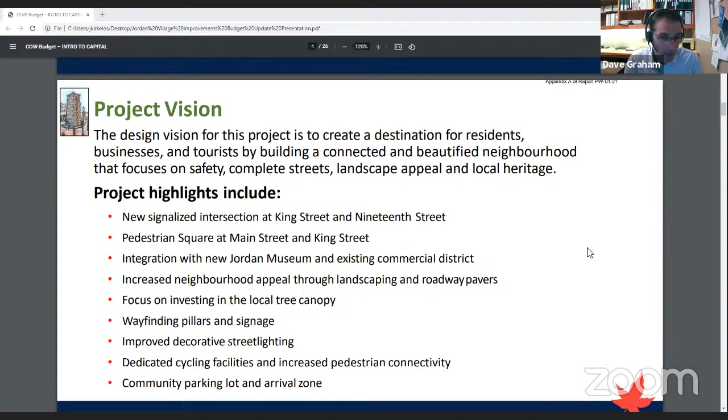So what we heard from the November 23rd Committee of the Whole workshop, we put this into some main themes. First, review the proposed soil cell and roadway pavers components of the project to help reduce overall project costs and determine applicability. We looked at opportunities to further enhance the gateway and wayfinding pillars. We want to include electric vehicle charging stations and consideration for paid parking, and also develop a community and local business communication strategy.

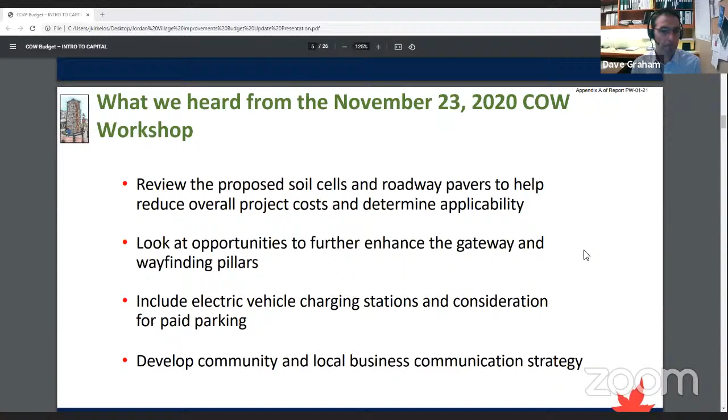So looking at soil cell technology, innovation in green infrastructure — what is it? It's an underground system that allows increased volume of organic soil beneath hardscape surfaces. You can see from the image there's a graphic to illustrate that. What this avoids is organic soil compaction around the tree root system. It enhances long-term tree health and life expectancy, increases the growth rate, speed, and size of a tree, prevents cracking and heaving of adjacent sidewalks and roads as the tree grows, promotes large tree canopies, reducing the urban heat island effect — which is really important with climate change and increasing temperatures. It provides stormwater quality benefits, and it doesn't require any ongoing maintenance.

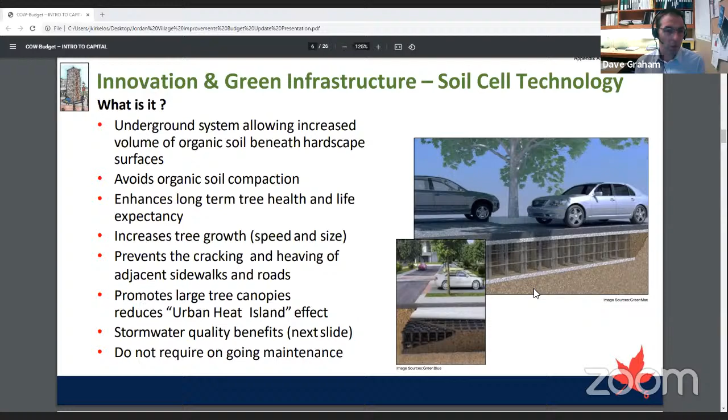From a stormwater management quality and low impact development perspective, soil cell technology can be used in conjunction with other stormwater management systems, such as oil grit separators for example — that's referred to as a treatment train process. The objective is to help clean the stormwater runoff quality. The soil cells capture what's called the first flush: when rain first hits the road and runoff starts draining off, we can capture contaminants like nutrients, hydrocarbons, and heavy metals. More importantly, through that process the stormwater is also providing irrigation to the root system of the tree to help promote its growth.

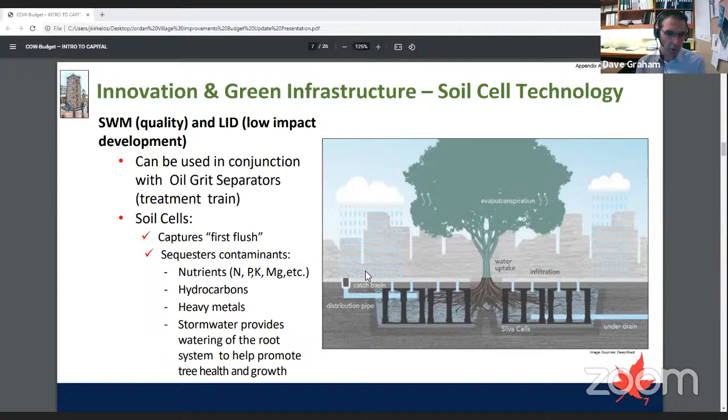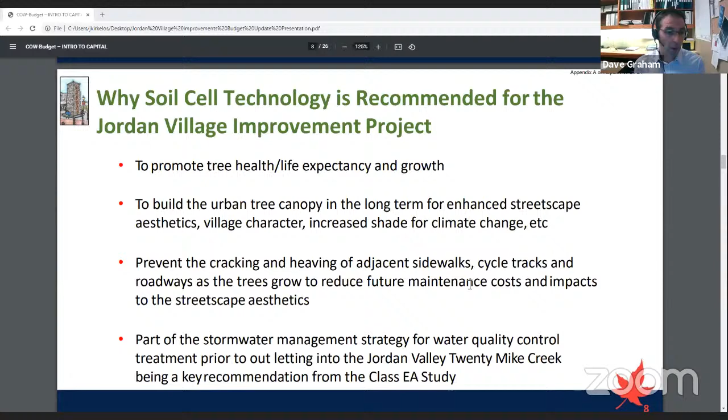So why is soil cell technology recommended for the Jordan Village Improvement Project? Number one, to promote tree health, life expectancy, and growth. We want to build the urban tree canopy in the long term for enhanced streetscape aesthetics, village character, and increased shade for climate change. Another important factor is preventing the cracking and heaving of adjacent sidewalks, cycle tracks, and roadways as trees grow, to reduce future maintenance costs and impacts to streetscape aesthetics and our investment in these surfaces. It's also part of the stormwater management strategy for water quality control treatment prior to outletting into the Jordan Valley 20 Mile Creek, which was a key recommendation from the environmental assessment study for this project.

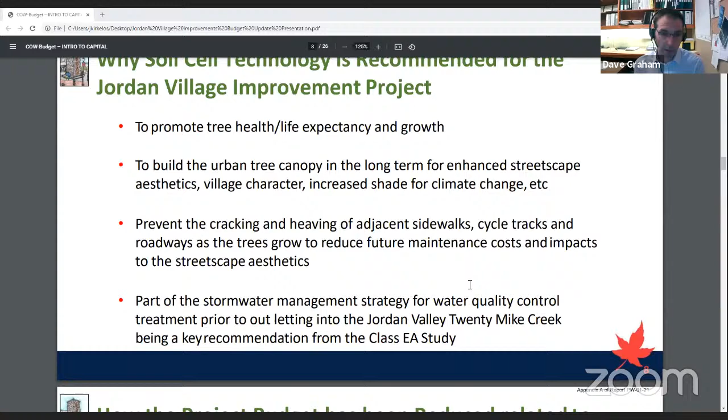How has the project budget been reduced related to soil cell technology components? The design team went back and spoke to municipalities who have used soil cells before. As highlighted earlier, we reached out to VRIC, who are experts in this field, and got a lot of good feedback from that consultation, and good advice on how we can further prioritize this technology on our project.

In an effort to look at costs, the design team has further prioritized the soil cell locations throughout the design and reduced this component by about 50%. For example, we've removed soil cells along 19th Street. We believe that in strategic locations where more space exists for tree health, we can augment those locations in lieu of soil cells. Some strategies we'll use: working closely with VRIC's tree scientists on developing enhanced soil specifications for trees where we're not using soil cells, and working with residents along 19th Street's east side, where we may place trees a bit further back from the sidewalk areas on private property. So we're going to look at that option as well.

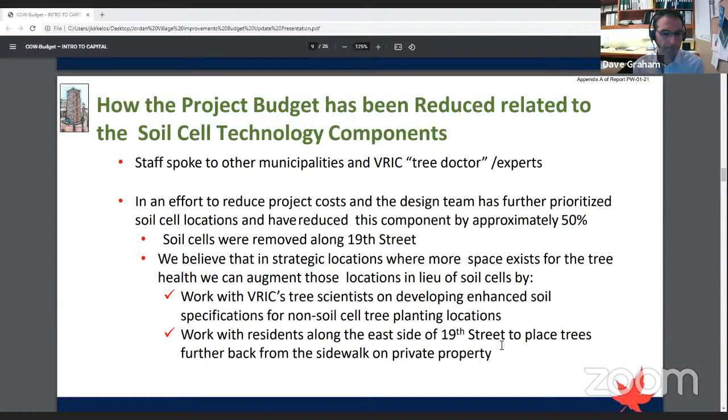So the remaining soil cells, we're only going to strategically locate those along Main Street, the pedestrian square area at the end of Main, south end, Snur Lane, and a few other locations on 19th Street. We're really following specific criteria for using soil cells with the current design—basically, where the new tree will be totally surrounded by hardscape surfaces like concrete, pavement, pavers, etc. That's where we really see the soil cells being very important.

Again, in alignment with consultation we had with some of those partners we talked about earlier, our objective here is to promote long-term tree health, and we want to prevent heaving damage of sidewalks, even roadways and cycle tracks, as the tree grows. This is also part of our stormwater management quality strategy, ensuring good quality stormwater runoff, given it's entering into the 20 Mile Creek.

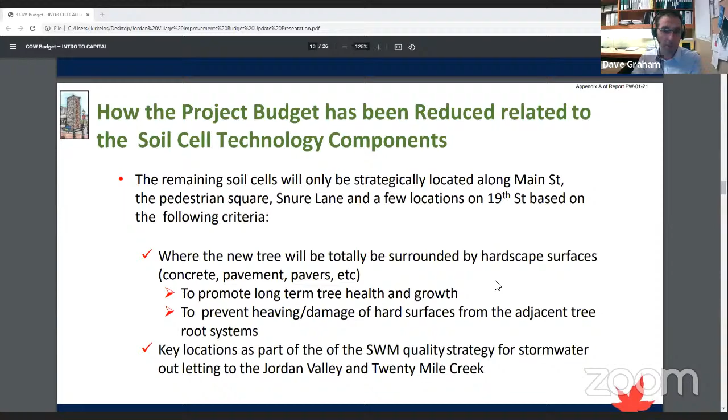So moving from the soil cell component to pavers—we want to talk here a little bit about why paver surface materials were and are recommended for our Jordan Village Improvement Project. It's really to provide an enhanced long-term streetscape village appeal. Surface design goals for the pavers have been a striking streetscape design as part of our overall vision to be a destination, attract tourism, etc. Another advantage is helping reduce the urban heat island effect, especially in areas where we want to promote pedestrian activity and gathering. That's another good benefit of pavers, also using them for wayfinding strategies, long-term durability, and as a traffic calming measure.

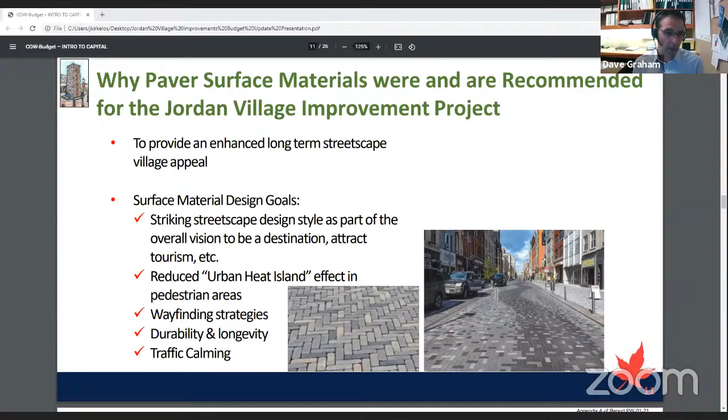So the design team went back again, looking at where we can reduce costs. When we look at pavers, keeping in mind a balance between the design aesthetic, material longevity, maintenance and operational costs, and initial capital costs—some points on pavers: aesthetics gives you the opportunity to have color and texture, and they're reliable in the long term from an aesthetics perspective. The lifespan of pavers is a lot greater than asphalt. When we look at sustainability, energy-wise, it takes a lot less energy to produce pavers than asphalt. When you look at durability, there's less replacement, less waste, compared to shaving off asphalt and putting new asphalt on. And as we mentioned earlier, reducing that urban heat effect.

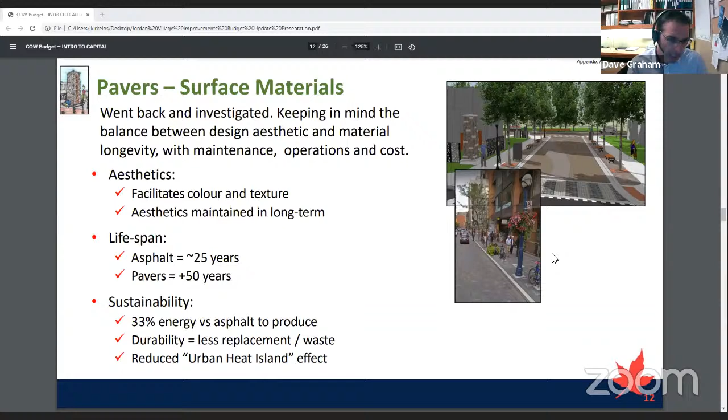So when we talk about pavers, this is how we've looked at reducing the project budget. But the design team was very careful not to compromise the overall streetscape goals and vision when we looked at removing pavers from these locations. We looked at Main Street, removing pavers from the road surface from Snure Lane to Wismer. We also looked at removing pavers from the drivable road surface from Main Street to 19th Street, and removing pavers in the large public parking lot stalls. So in other words, the main roadways will no longer have paver materials.

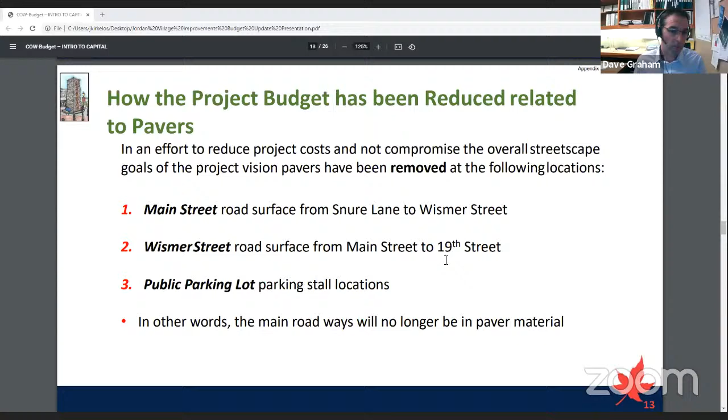In terms of Main Street and Wismer Street, these areas all had on-street parking bays and have been identified as areas of key focus and attention. Although we removed pavers from the main driving surface of the roadway, we're still recommending keeping pavers in the on-street parking laybys. We feel that will help maintain the streetscaping enhancement, connecting both ends of Main Street, which is one of our objectives. There's also an opportunity with the crosswalk at the north end of Main Street in the retail section to make that a decorative surface and make it stand out. So this is a significant reduction in pavers on these two streets, but including the pavers in the laybys and other key areas will still provide that aesthetic appeal and connect both ends of the street, which is our objective.

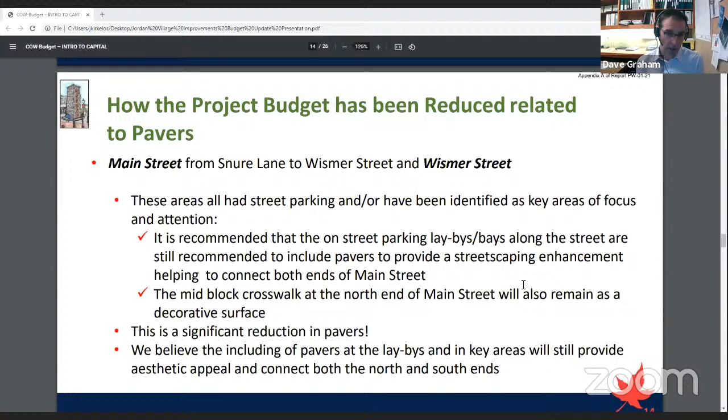Next slide, please. This rendering here is of Main Street, and Wismer Street is kind of the street—I apologize, it doesn't have a label on it, but it's at the right side of the screen. As you can see, we've removed the pavers from the drivable road surface, but decorative pavers still remain in all the parking bays along the roadway.

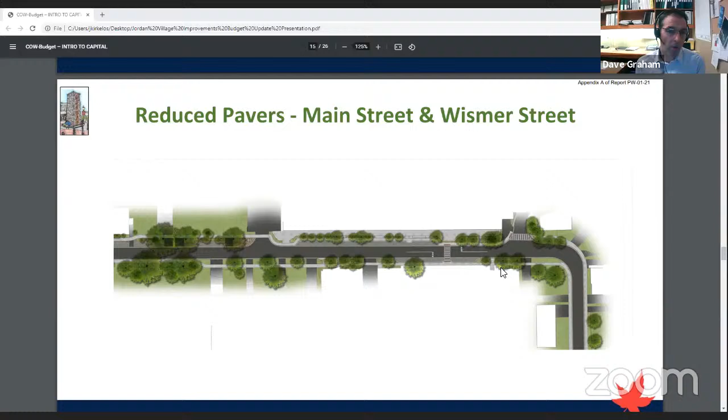This particular rendering gives you another perspective. When we look at the left side of the screen at Main Street and where Snure Lane comes in, we're suggesting here we would transition from pavers to asphalt as we head north along Main Street.

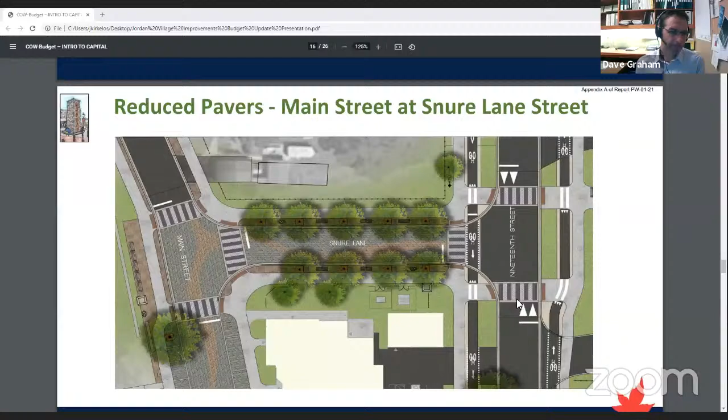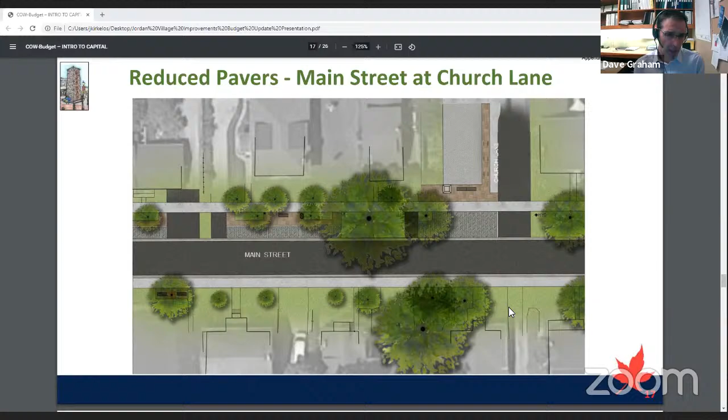This rendering gives you an example on Main Street at Church Lane, where the new museum property is located. As you see, the drivable road is proposed to be asphalt, and we've removed pavers from that. But you can still see the decorative pavers in the bus bay parking for the museum, and in the on-street parking laybys on the side of the street, to maintain that streetscape appeal.

In terms of the public parking lot, again trying to look at where we can help reduce costs, we removed pavers from the parking stalls within the parking lot, but we're still recommending to keep pavers on the main driveway entrance off 19th Street. For that streetscaping, we want to give people that sense of arrival as they enter the parking lot, as well as support the wayfinding strategy.

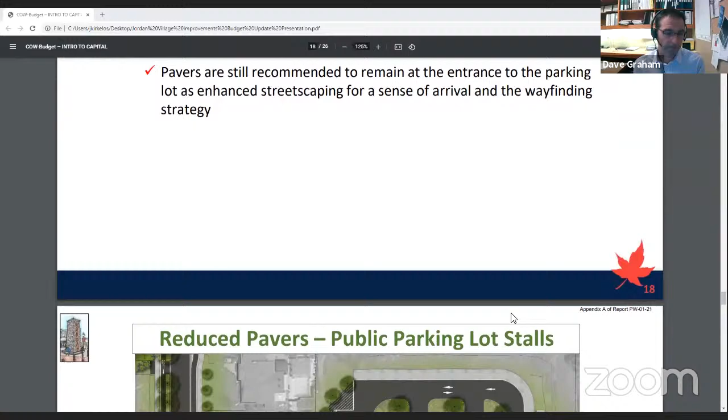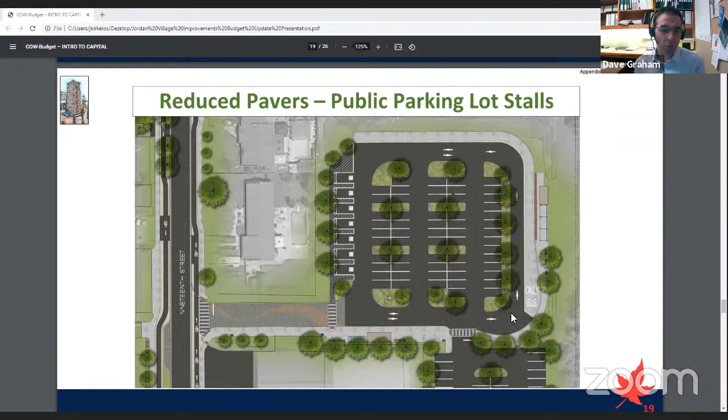The rendering here gives you a bit of a visual on what I was just referring to. So when you come off 19th Street, we still would like to keep pavers just to really give that streetscape sense of arrival feel as you come into the parking lot.

Updated reduced project budget. Based on the soil cell and paver reductions I've just outlined in the presentation, we were able to reduce the town's budget for this project by 1.1 million. So basically what we're looking at now in terms of the town's share for this project is 9.9 million, as opposed to the $11 million we previously presented at the Committee of the Whole workshop last year.

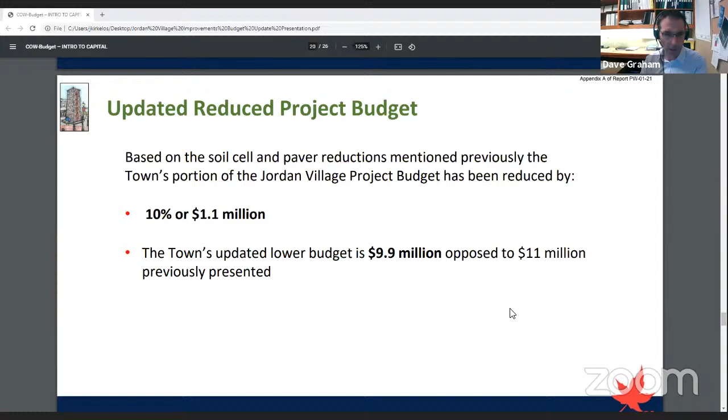This slide gives you a little more detail on the funding sources for the budget. The Niagara region has a contribution to this project of $1 million. As we look at the town's cost for this project, we've got about $1.6 million in water and wastewater reserves, about $5.5 million in development charges, and $2.7 million proposed for long-term borrowing, all totaling up to $9.9 million for the Town of Lincoln's cost on this project.

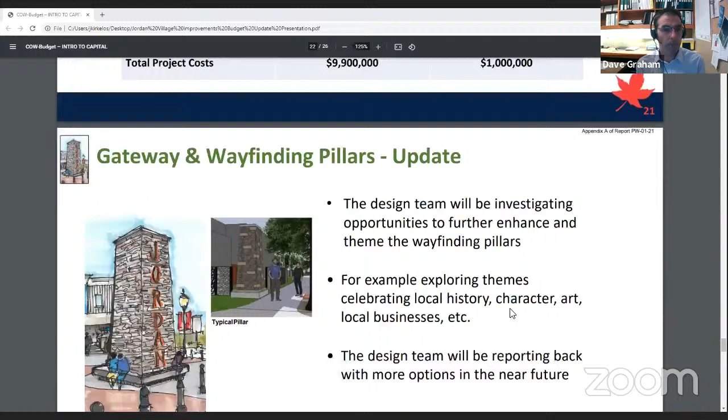An update on the gateway and wayfinding pillars. At the Committee of the Whole workshop, we had a lot of good feedback and suggestions from council on some different ideas. The design team has taken all that feedback back and is looking at opportunities to further enhance and theme the wayfinding pillars, exploring themes celebrating local history, character, art, local businesses, etc. The design team will be reporting back with more options in the near future for council's information.

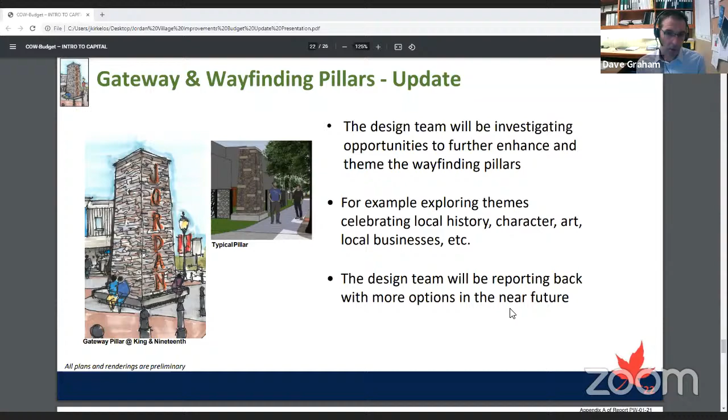In terms of the public parking lot, electric vehicle charging stations, and paid parking meters update, we got a lot of great feedback from council on this. To summarize, the proposed parking lot upgrades will include all the necessary infrastructure to accommodate electric vehicle charging stations—that will happen, that's our mandate for this parking lot. We're also going to be looking at the paid parking infrastructure as well.

Some project next steps: Council is to consider approving the reduced 2021 capital budget for this project, which is the subject report tonight that council is considering. Final stakeholder meetings are being scheduled—we want to share our final design plans and coordinate with those landowners. Detailed design is nearly complete; we're finalizing details as we review them tonight, and we want to be in a position to tender this project, subject to budget approval.

We're developing a community and local business communication strategy, which is very critical to the success of this project, and we are committed to doing an excellent job on this. We're going to be bringing in a specific project resource to focus on resident engagement, address project elements and issues, and provide a high level of customer service to our residents and businesses on site.

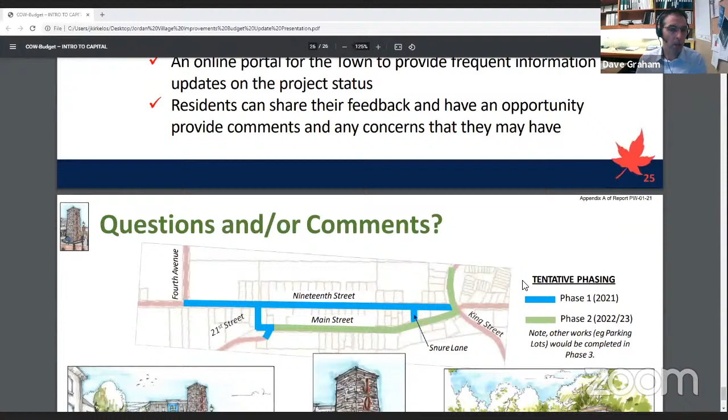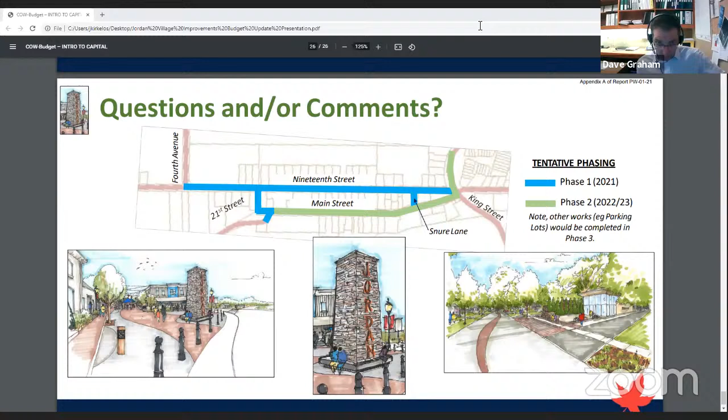So with that, that's the end of the presentation. Happy to answer any questions or comments. Both myself and Walter Neubauer, our manager of engineering services, is here to help with that.

Thank you, Director Graham. Do we have any council questions or comments to the report? So we have the CAO that would like to say a few words. Go ahead, Mr. CAO.

Through you, Mr. Chairman, I think maybe just to provide an additional point on the budget, under the tenet of being completely transparent around total budget costs. One of the things I wanted to highlight, council will recall, over the last number of years we also partnered with NPEI to make sure that we were able to bury the wires. And NPEI has been a great partner. They've actually covered half the costs of that wire burying effort.

Director Graham and or Walter can probably give me the exact numbers, but it was in the range of a little over $1.4 million initially was that estimate, and NPEI came to the table covering half of that. So there have been previous monies allotted to the tune of about $700,000 or a little bit more for that burying of the wires as well. But those were previous budgets, previous allocations, but I did want to highlight that as well.

Thank you, Mike, for that update. I thought I saw a hand, but I guess I didn't. It disappeared. Mary, Mayor Easton, please go ahead.